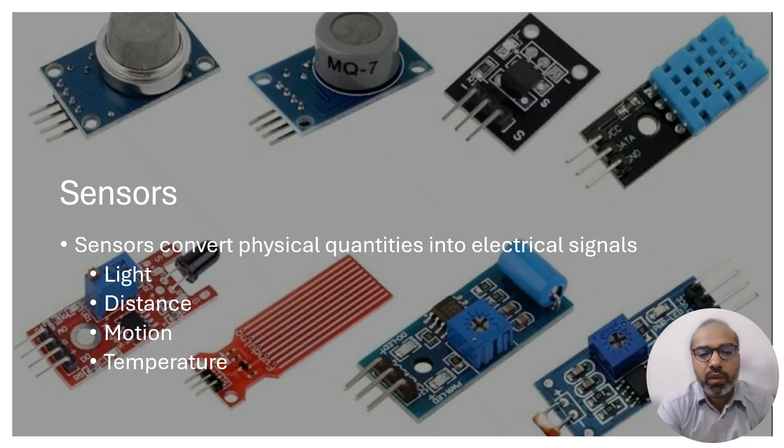Sensors convert physical quantities into electrical signals, like light, distance, motion, and temperature. Similarly, actuators are devices that convert electrical commands into physical motion. Those motions can be rotation, moving something upward and downward or left and right, or vibrations.

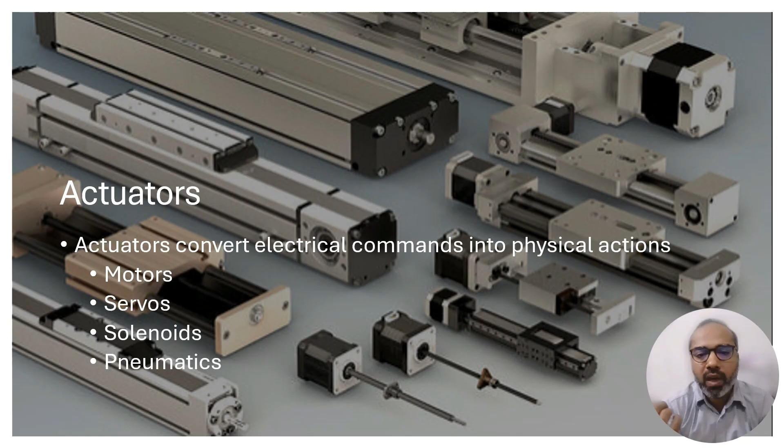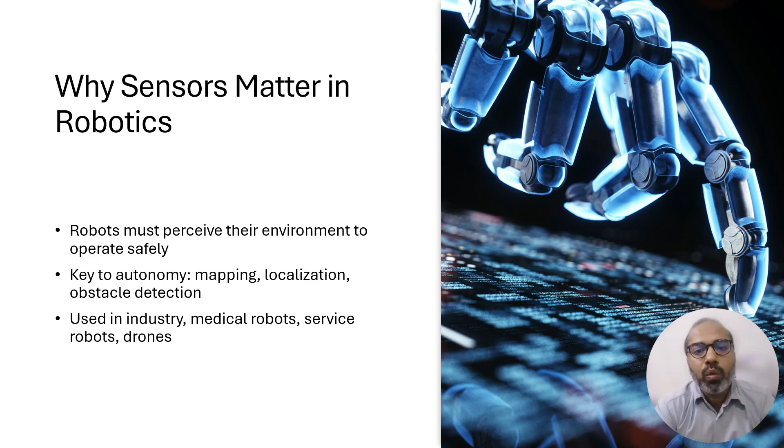Sensors are important because a robot cannot operate safely unless it can observe or understand its environment, whether it's avoiding obstacles, recognizing objects, or understanding its own position. All of that starts with sensing. Sensors are also key to autonomy. Robots rely on them for mapping, localization, and obstacle detection. And this importance isn't limited to one field. Sensors are used in industrial robots, medical robots, service robots, and drones, making them fundamental to almost every robotic system we use today.

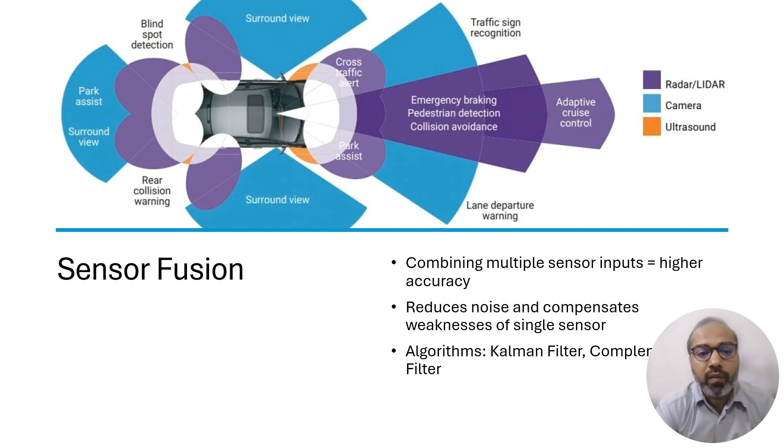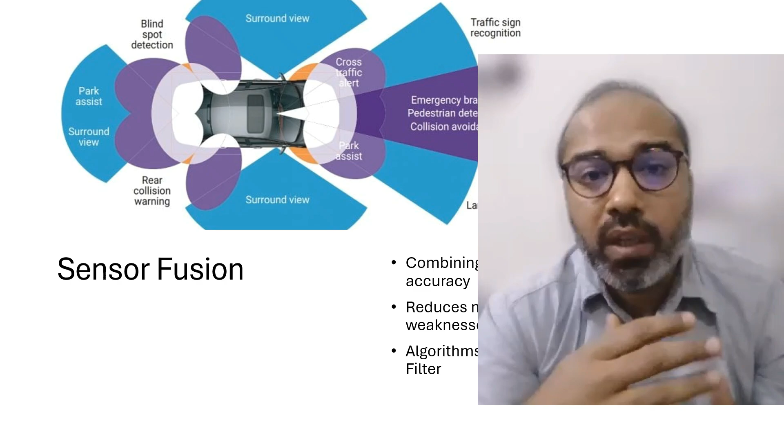Sensor fusion combines data from multiple sensors to give a robot or any machine a much clearer and more reliable understanding of its environment. Cameras, radar, lidar, and ultrasound each have strengths and weaknesses, so fusing them reduces noise and improves accuracy. A self-driving car typically uses 20 to 30 sensors, including more than six cameras, multiple radars, a couple of lidars, and multiple ultrasonic sensors. Together, these enable safe navigation, obstacle detection, and real-time decision making.

Instead of following a fixed set of instructions, artificial intelligence-based systems recognize patterns, improve with experience, and automate tasks that would normally require human thinking. That's why AI is now used everywhere, from healthcare to finance to robotics, and in everyday apps we use on our phone.

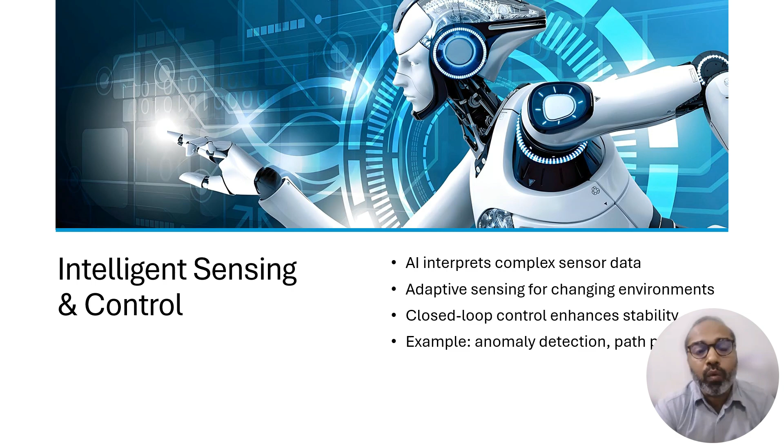To achieve intelligent sensing, AI is integrated. Instead of just reading raw sensor values, AI helps interpret complex data, whether it's image, motion pattern, or environmental signals. These systems also adapt their sensing based on changing conditions, which makes the robot more reliable in real-world environments.

Combined with a closed-loop system, the robot can continuously monitor its action and correct itself in real time. Typical examples include anomaly detection, spotting when something is wrong, and path planning, where the robot figures out the safest and most efficient route to follow. Such decisions are very important, whether for cars, aircraft, any processing industry, or any medical related equipment.

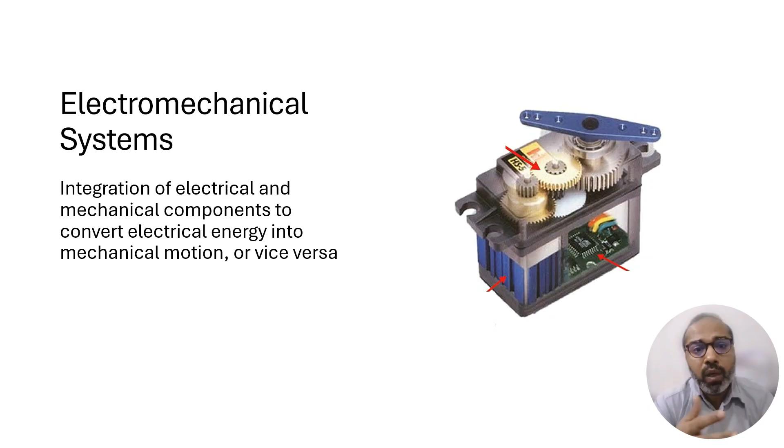Now let's see electromechanical systems. Electromechanical systems combine electrical and electronic components with mechanical parts to create useful motion. When an electrical signal is given, the electromechanical system converts it into mechanical movement, like rotation, pushing, or lifting. In some cases, they also work in reverse, turning mechanical motion into electrical signals. This idea forms the foundation of many robotic components, especially motors, actuators, and sensors that rely on both electrical control and mechanical motion.

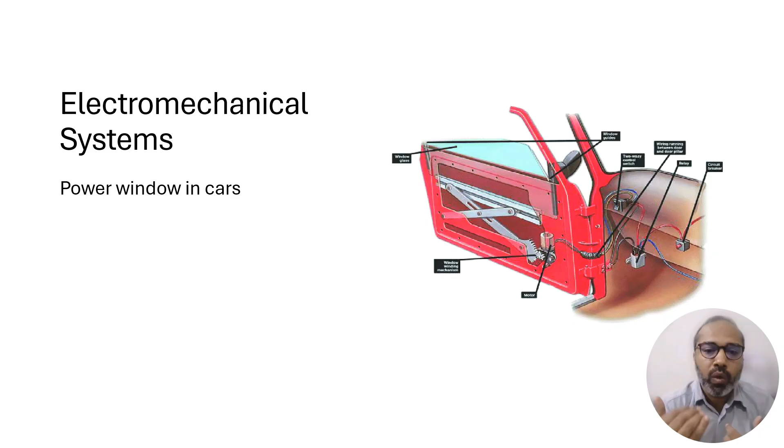Here's another example, a temperature maintenance system, where there's a temperature sensor that sends data to a computer, like a single board computer, Arduino in this case, and based on different commands and programming, that computer controls turning the fan on and off, or controlling its speed.

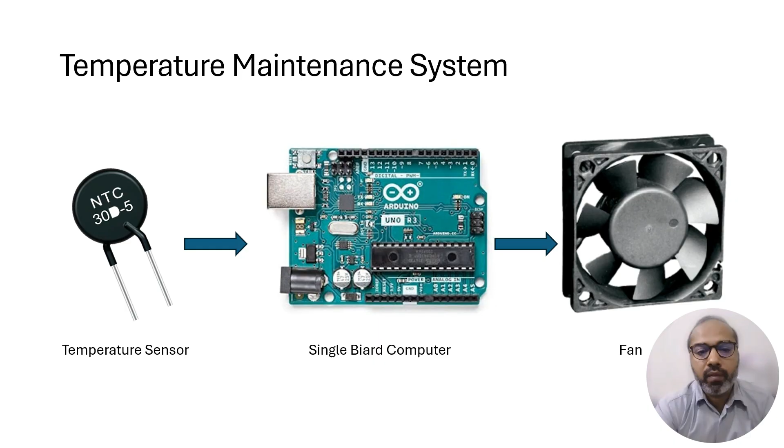Here's another example, that is an obstacle avoidance system, in which an ultrasonic sensor sends some data after sensing to the computer, and the computer makes some decisions to stop or move the wheel in which direction and at which speed.

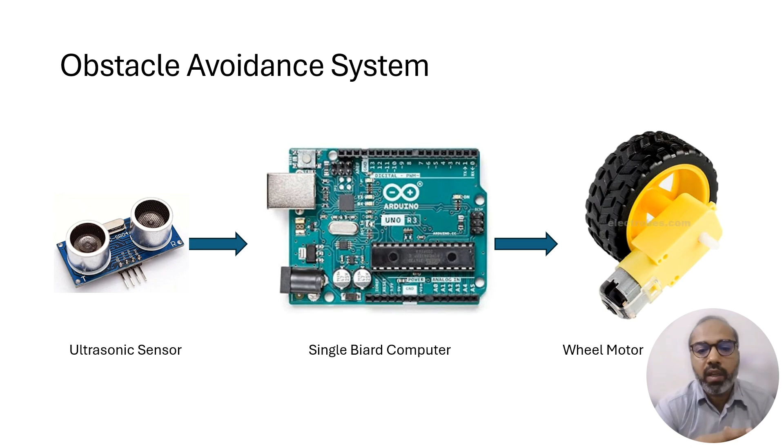Micro electromechanical systems, or MEMS, are tiny electromechanical devices built directly on a silicon chip. They combine sensors, actuators, and electronics at a microscopic level. Just imagine the size of a micrometer, even smaller than the thickness of a human hair.

If we see their importance, they are extremely small, consume very little power, operate with higher precision, and respond very quickly. Because they are made using the same processes as integrated circuits, they become very inexpensive when manufactured at large scale or large quantities.

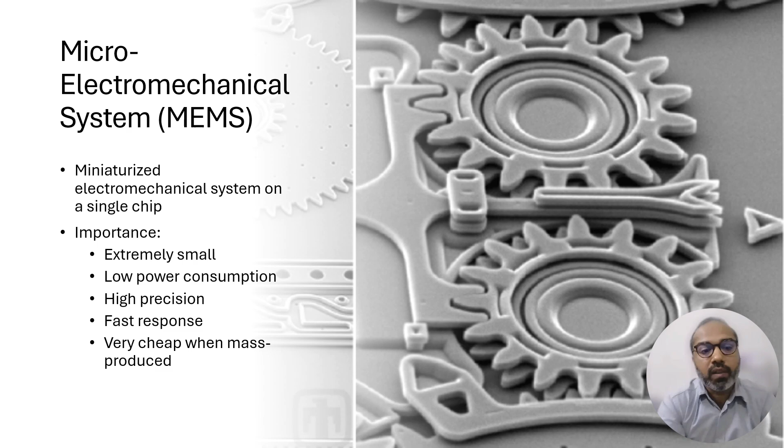There are some electromechanical systems which are built at the nanoscale level, and those are called nano electromechanical systems or NEMS. If we compare MEMS and NEMS, NEMS provide better sensitivity and faster response, while MEMS offer better reliability and easier fabrication.

Now let us understand where we can see MEMS-based systems in our daily life. Accelerometer measures linear acceleration and is used in robots, drones, and even smartphones for detecting movements and orientation.

MEMS gyroscope measures rotation, which is essential for drones, balancing robots, and navigation systems. MEMS pressure sensors use microscopic diaphragms and are widely used in medical devices, automobiles, and robots to measure air or fluid pressure.

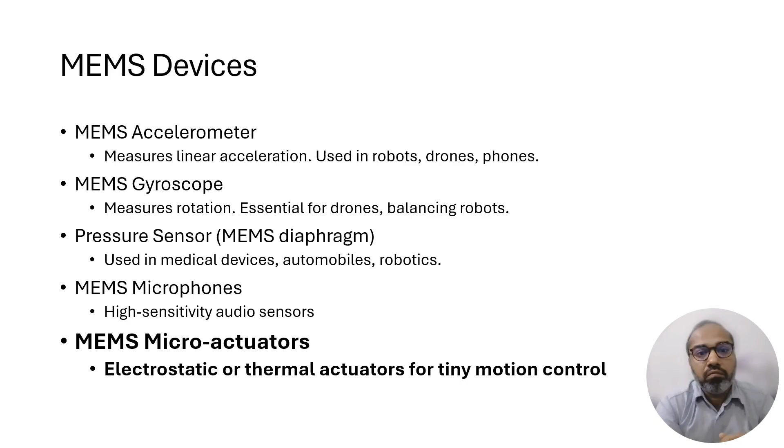MEMS microphones are ultra small, high sensitivity audio sensors found in phones, wearables, and robots for voice detection. Finally, MEMS micro actuators are devices which use electrostatic or thermal mechanisms to create tiny movements, enabling precision control in optical systems and micro robots.

Now let's see the importance of MEMS based devices. MEMS devices play a really important role in many robotic applications. For example, in autonomous navigation, MEMS accelerometers and gyroscopes help robots stabilize, balance, and understand their orientation. In medical robotics, MEMS pressure sensors and micro actuators enable extremely precise and minimally invasive surgical movements.

In industrial application automation, MEMS sensors support quality control by monitoring vibration, motion, and pressure with very high accuracy. Moreover, in wearable robotics or prosthetics, MEMS inertial sensors make movement smoother, more natural, and more responsive to the user of that prosthetic.

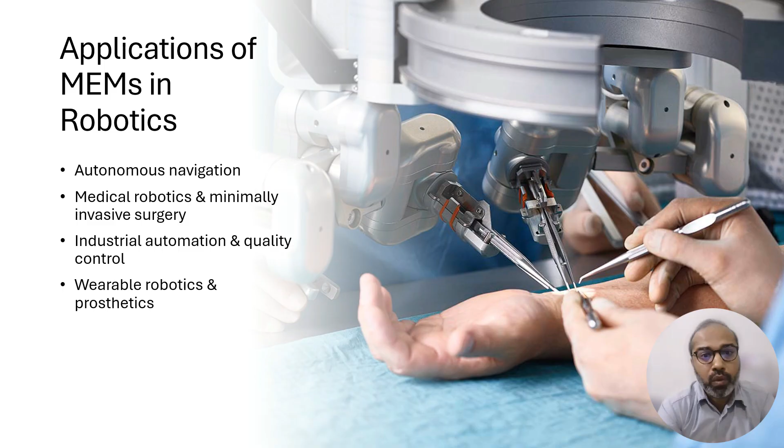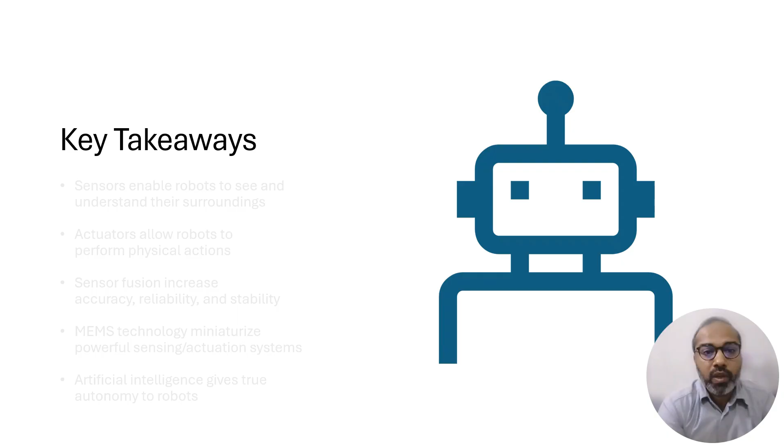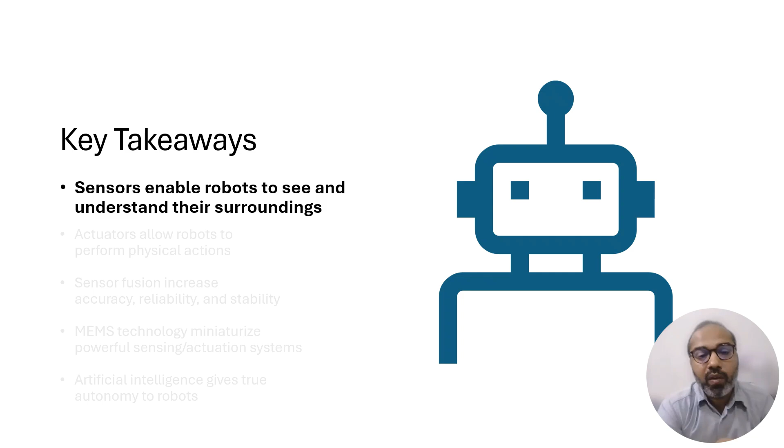Since the purpose of this video is to create a foundation to understand sensors and actuation, especially in the field of robots, let's see before closing what are the key takeaways from this video. First, sensors give robots the ability to see and understand their surroundings. They are the foundation of perception.

After the processor processes the sensed data, they are able to take some decision based on the algorithm or the purpose we are making that system for. The actuators take those decisions and convert them into real physical action, and such actions together make it happen, that what we are actually wanting that robot or system to do.

We also saw how sensor fusion, like combining data from different sensors, can improve a robot's accuracy and stability by combining data and processing accordingly. The fusion of data coming from different sensors has so much importance that overall noise is reduced, overall sensitivity is increased, or stability of the system is improved significantly.

After that, we saw MEMS technology allows powerful sensors and actuators to be miniaturized and embedded into compact robotic systems. Since such systems are all integrated into a single chip, the overall size, overall cost if manufactured at mass level, and overall performance, speed, response time, everything improves a lot.

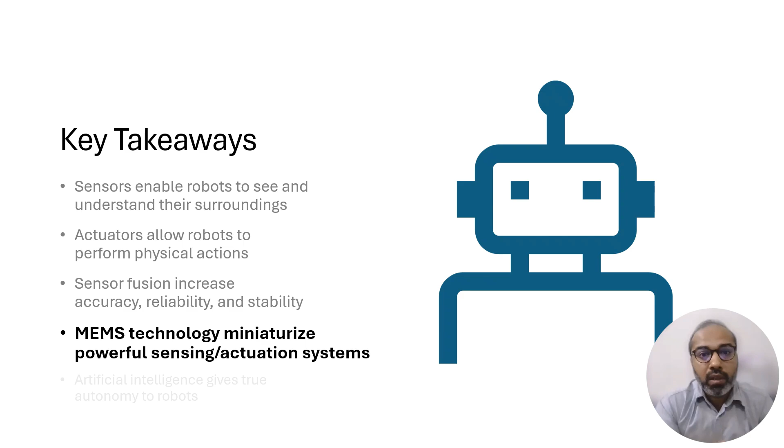And finally, artificial intelligence, which is being used in almost every field in today's world, is also being used in the field of robots and industry. AI ties everything together by giving robots the ability to learn and adapt and achieve true autonomy.

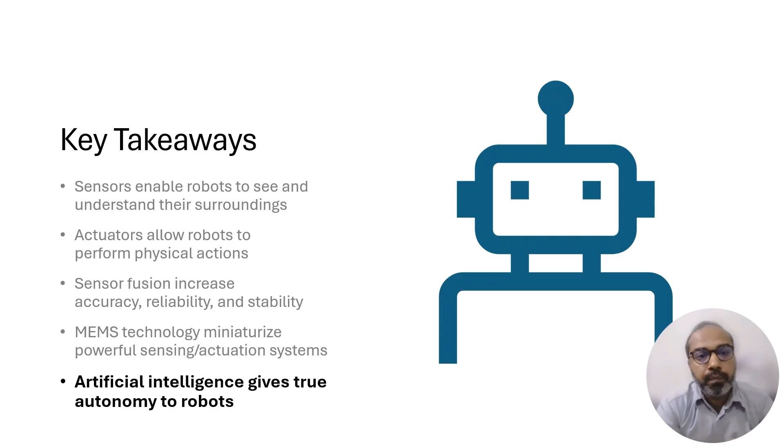Robotics becomes truly powerful when sensing, action, and intelligence come all together, just like we discussed today. When a robot can sense what is around it, it makes smart decisions and then acts on it, it becomes a very useful and reliable machine.

When we see in our real life, for example, in a robot vacuum that detects obstacles and changes direction, and in a drone that keeps itself stable in the air by reading sensor information 1,000 times in a second.

Although today we focus mainly on how robots understand and interact with their environment, there are still a lot of things happening behind the scenes. Modern robots use advanced electronics, tiny MEMS sensors, machine learning models, and fast control loops to work smoothly and, of course, safely. All these hidden technologies play a huge role in making robotics more intelligent and more capable every year.

As we continue to explore, we'll see that every concept we discussed today connects to even bigger ideas. For example, autonomous driving, medical robots that perform precise surgery, or industrial robots that learn with their experiences and improve their performance over time.